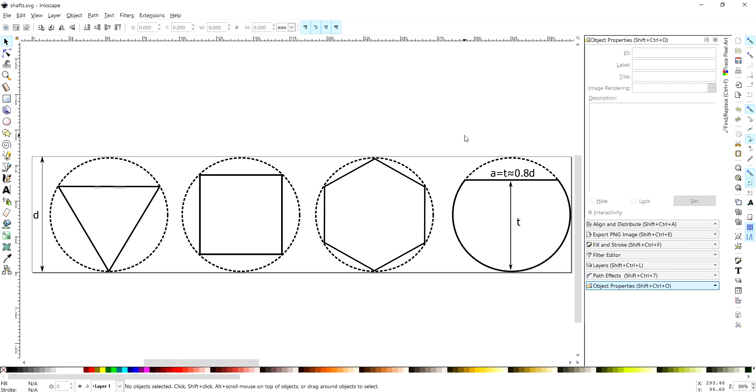Now basically I want to cut the cross section from the same size of the shaft. Here I use a 20 millimeter shaft, and then run a simulation using a linear simulation and a linear contact. I will explain about that later. Only for the D shaft, you can cut different cross sections by changing T, but the best performance you get is from a D shaft where 20% of it is cut off. So the remaining T is equal to 80% of the diameter.

So let's move to NX. I start by modeling the shafts first. Here I first make the main shaft, a 20 millimeter shaft.

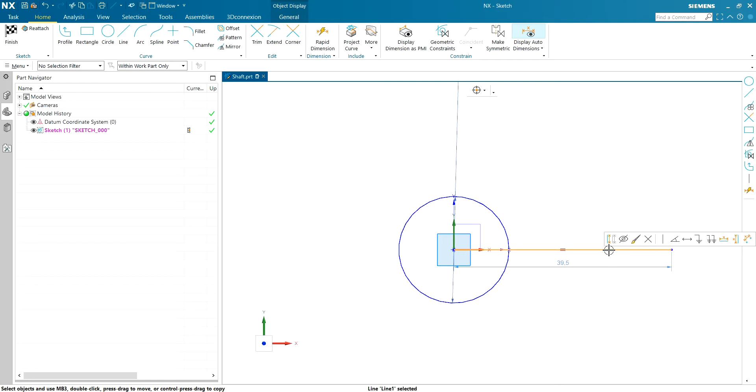And then I need a reference line to replicate this shaft. I'm gonna use pattern, and pattern this curve along this line. I have 4 shafts and click OK.

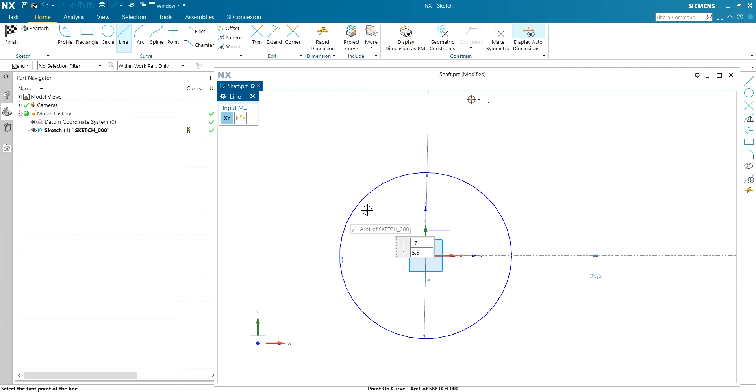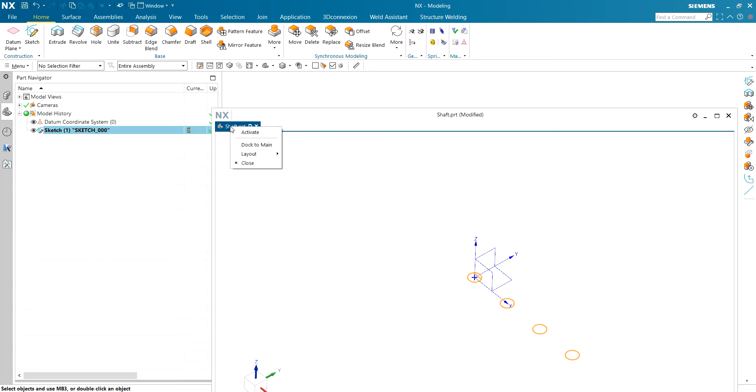First one I'm gonna do is the D shaft. Just need to make a cut here. Let me turn off this. And also let me... yes, and I need to make a horizontal now. Okay.

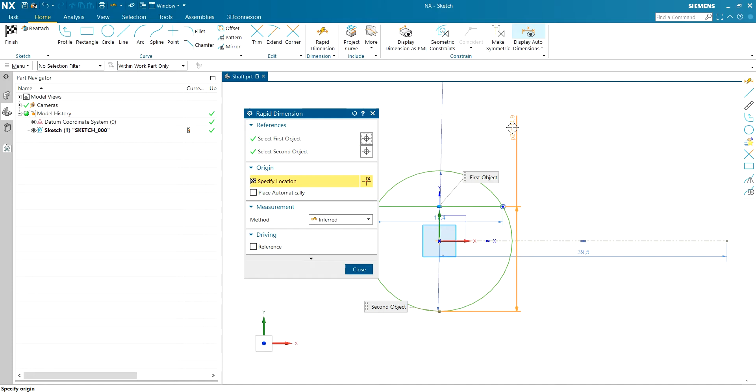Now it is horizontal, and then I need to have a dimension here, from here to this point. This should be 0.8 multiplied by 20, or 16. Now the shaft is ready and I can extrude.

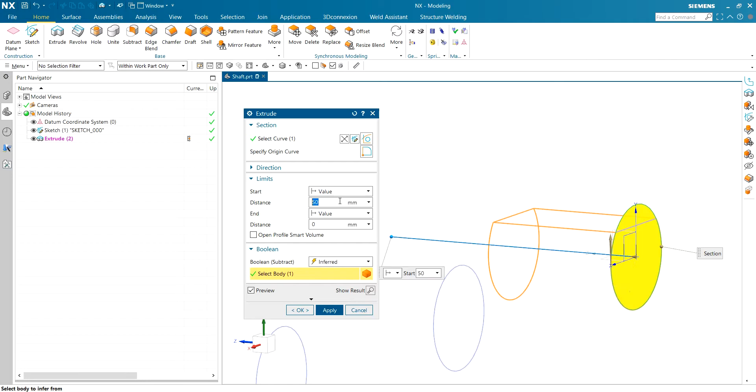I'm going with region boundary curves, and I want to extrude 25 millimeters on this side, and then on the other side I need a single curve. I just pick the circle, and 50 seems good. That's the other direction. I need to unite these two and click OK.

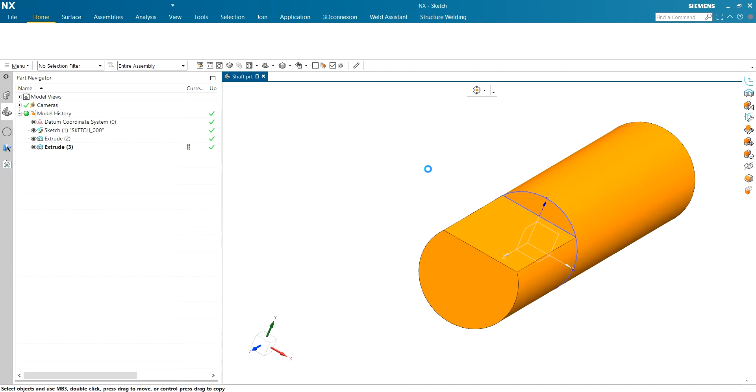So this is the shaft, and then I need to do the same thing for the hub. I start the hub from here.

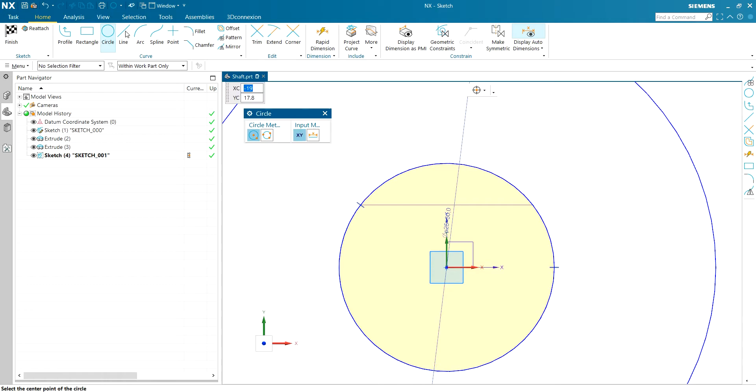Let me turn back this on, and 50 seems good. And I also need to make the D section that is matching my shaft. I need to turn this off, and here we go.

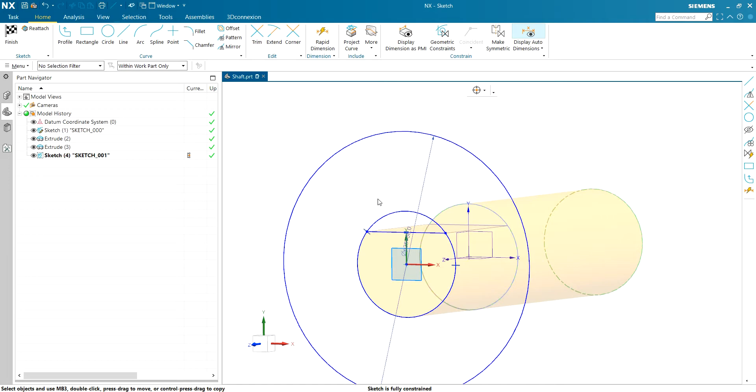And I can actually trim off the subpart, so I don't need it. And now I can extrude this, for 20 millimeters, leaving some gap here because I don't want these two faces to be in contact. This contact has no effect on the simulation, so I leave some space. Also, this sharp corner here is going to generate some wrong results, so I want to stay away from that.

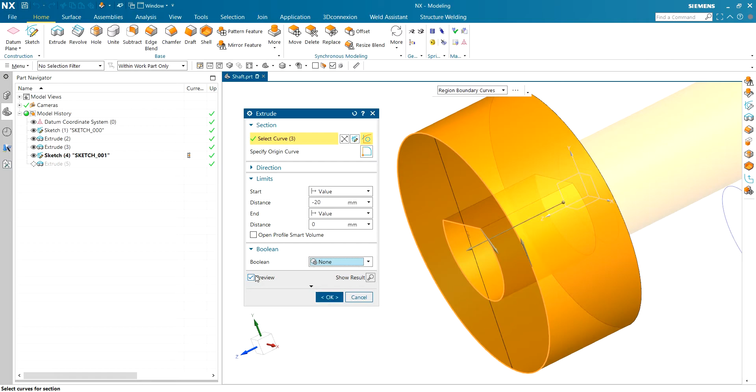Now, speaking of sharp corners, before we move on, you need to remember that we need separate bodies, so we shouldn't unite here. Or you can just model the hub in a separate part and bring it to this as an assembly. But here I use none for the boolean, and now we get two bodies: the hub body and the shaft body.

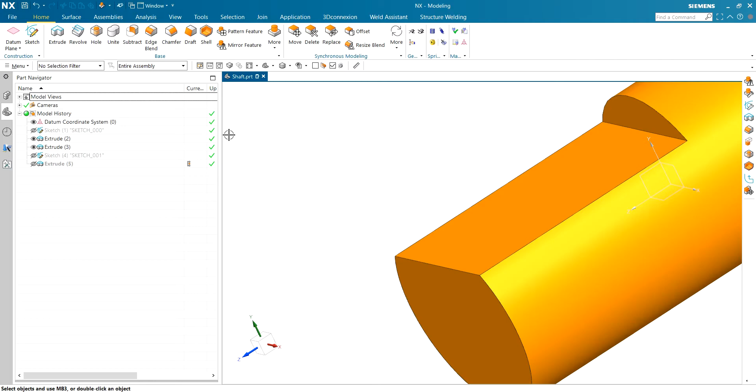Now starting from the shaft, let me hide the sketches. I have two sharp corners here that are going to make problems by causing singularity. So I'm gonna generate a fillet here and here. Sorry, this is chamfer, an edge blend. 0.5 millimeter is good. I will do the same for the hub.

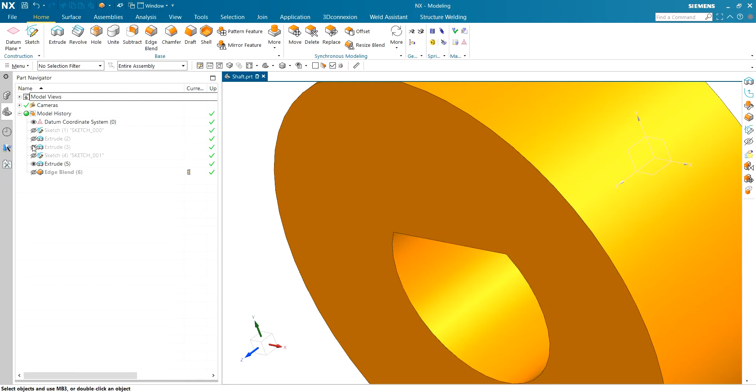And now I can take this to the pre-post. I'm gonna save here. And go to the pre-post.

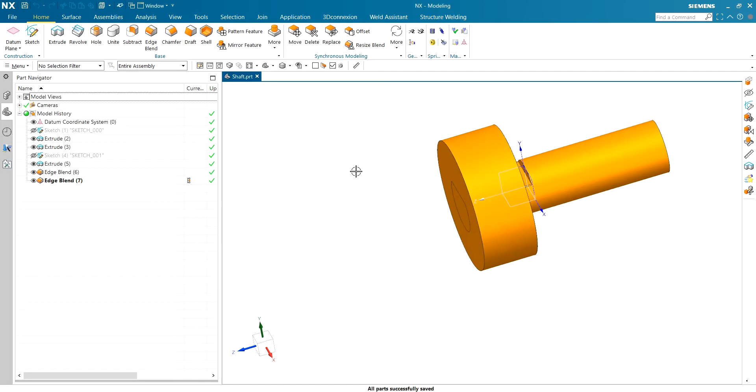Now before I make a new FEM and simulation file, I want to divide the face here on the hub so I can make a contact pair between the shaft and the hub. Otherwise, I have to make a contact between the whole outside face of the shaft and the internal face of the hub, which makes the simulation slow.

To do that, first hide the hub and I'm gonna use divide face. The face that I want to divide is basically all the faces I can select, and then offset the curve. I'm gonna offset these curves, and this line here shows where it is cutting, and I'm gonna go with 20, which is the size of the hub. Okay, so now we have a cut here.

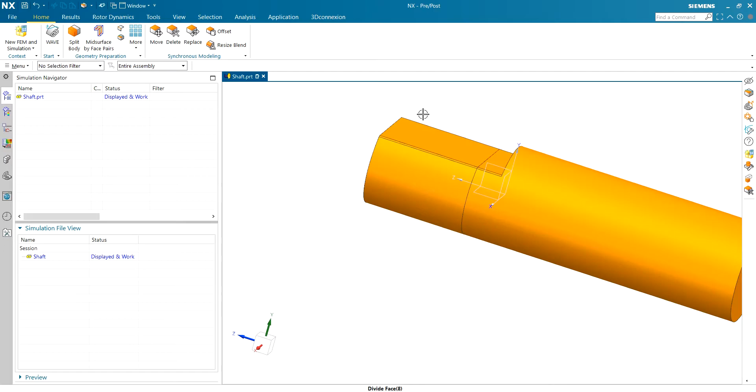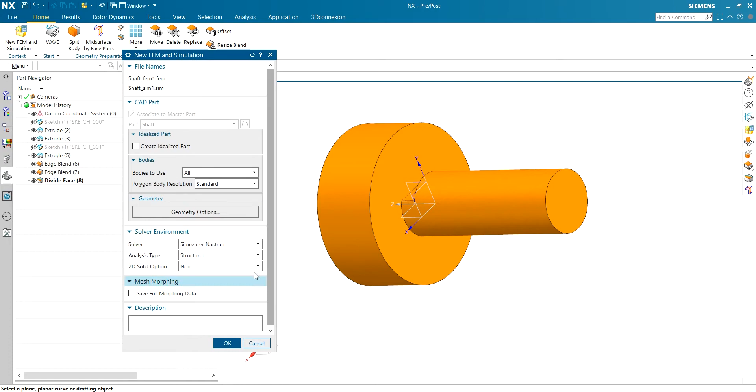And let me bring back the hub. Yes, now we can see that I have a cut where the hub is sitting. Now this is ready for the FEM and simulation file. So I'll make a new FEM and simulation file. I want all the bodies in the simulation. Click OK.

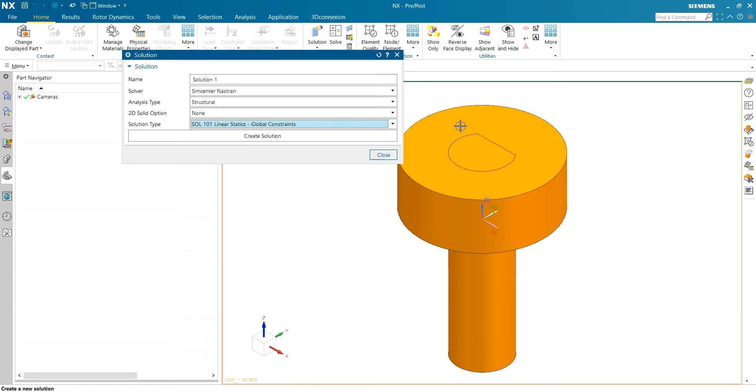Here in the simulation, I want to do a linear static, but you need to know that contact in nature is nonlinear. So usually you need to go with 401 multi-step nonlinear, or 106, or 601 for advanced nonlinear statics. But only if the deformations are small, you can use a static analysis and linear statics and linear contact. Now, to make that more clear, I'm going to show this example from the NX user manual.

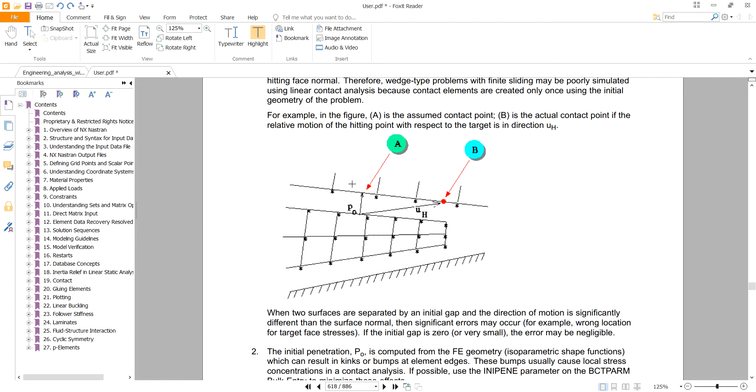As you can see here, we have a wedge that is moving in this direction, and these faces are going to be in contact with the top faces and bottom faces. In a linear simulation, the software reads the geometries only once at the start of the simulation, and it will assume that faces are going to touch the faces in front of them that have normals facing each other. So the software will assume that this point P0 will touch the outside face at this point, and other faces are also touching like this.

But in reality, the wedge is moving this way, so this point P will touch here in reality at point B. But a linear simulation or linear static does not consider large deformation like this. The deformations are small, so that's why in linear contact, the software will set this as the contact point.

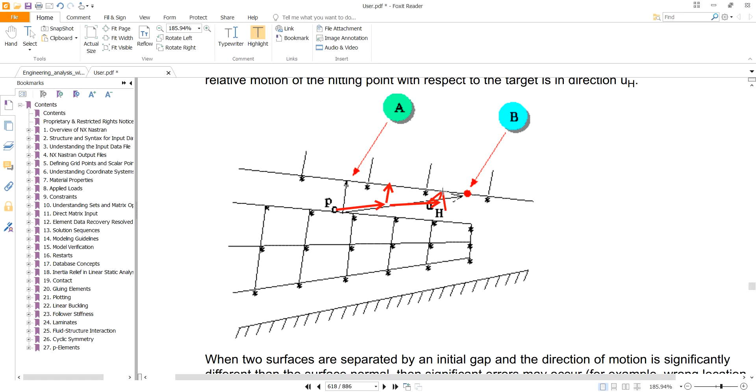In a nonlinear simulation, the software actually regenerates the contact faces. So this face will move here. There is now a new pair of contacts, and the software looks at that and it's going to be at this point. Then the wedge moves a little bit forward to this point, and the software generates a new contact pair from this point to that point. At the end, when the face reaches here, the contact generates the last contact pair at this point. So you need to make sure the deformations are small, otherwise you cannot use linear statics.

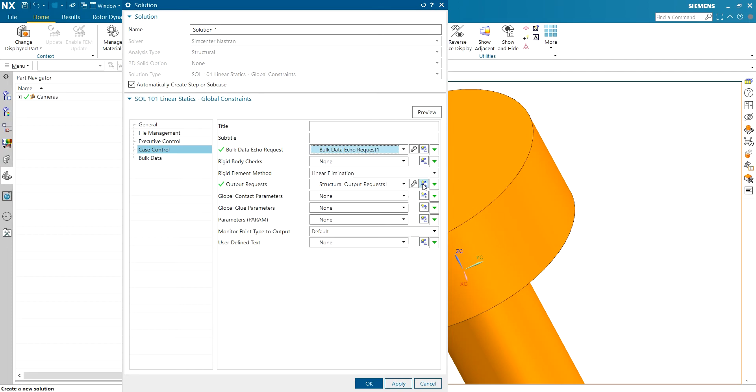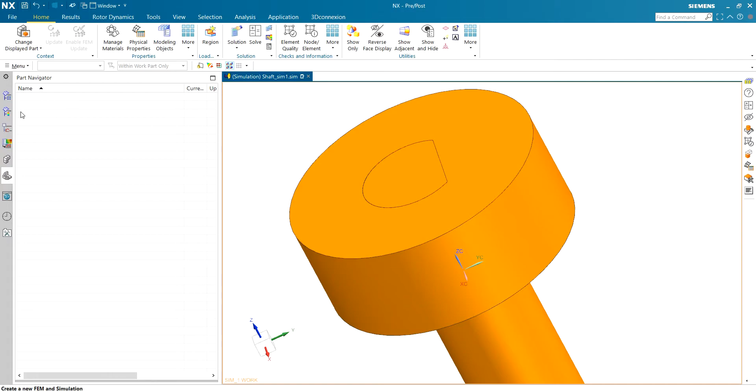Here I assume that the deformations are small, and I can use the 101 linear statics. I create a solution, and before moving on, we can also change this in the solution edit options. I want to request more output, so I will change this. Note that you can request any kind of output that you want from the software, and it will show up in the results. Here I only want to turn on the contact result so I can see contact pressure and contact force. Click OK and it will make a new solution.

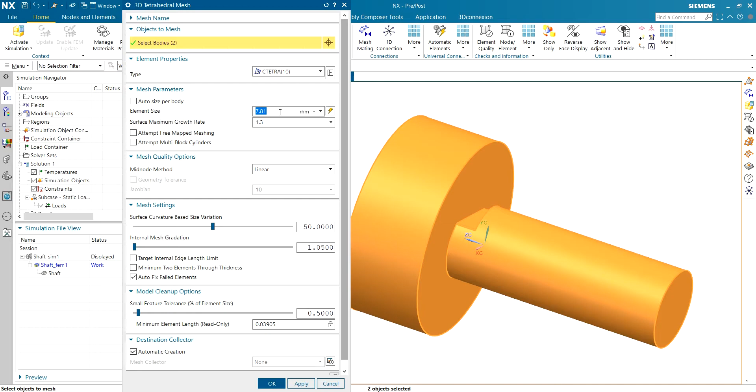So here we are in the .fem file and we can start meshing. We'll use 3D tetrahedral and select all the bodies. I reduce the size to 4. Let's see how it looks. Now let me hide the hub so we can have a better view of the shaft.

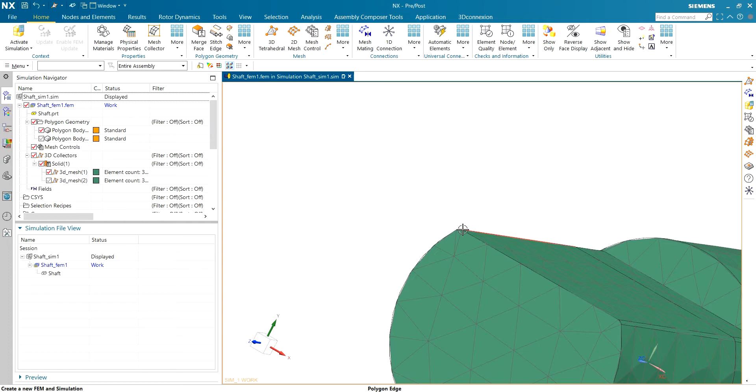Also with the polygon. Now here the problem is that I have a sharp corner on the fillet which may generate some singularities, so I need to make the mesh a little bit finer at the fillets. To do that, we can use mesh control on these faces, and we can use the fillet option and pick these two fillets. The sizes are okay, and I'm going to do the same thing on the hub. Doesn't matter if you pick the polygon or the mesh.

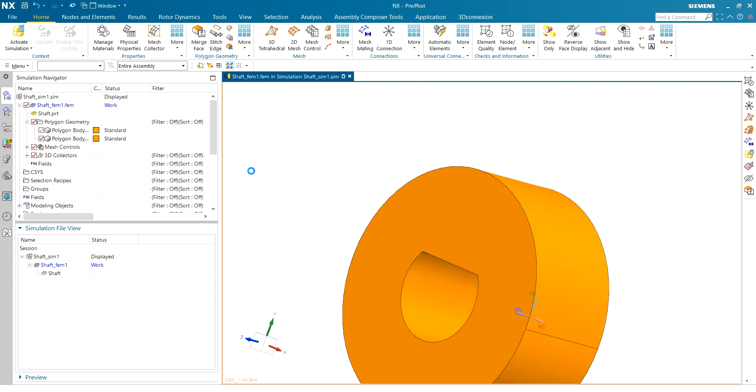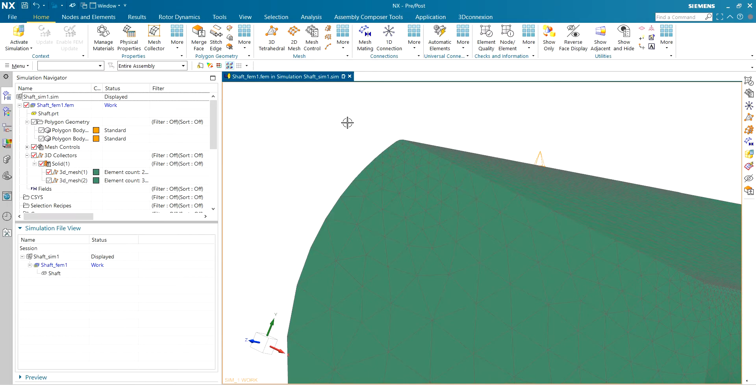Here I have a fillet here and one here. Use the same size and update the mesh. Now if I bring back the mesh and hide the polygons, let's take a look at the shaft. Now you see that I have a bit of a finer mesh along the fillets, except this end, which I'm not going to look at for the result. If we take a closer look, now we have two elements along the fillet.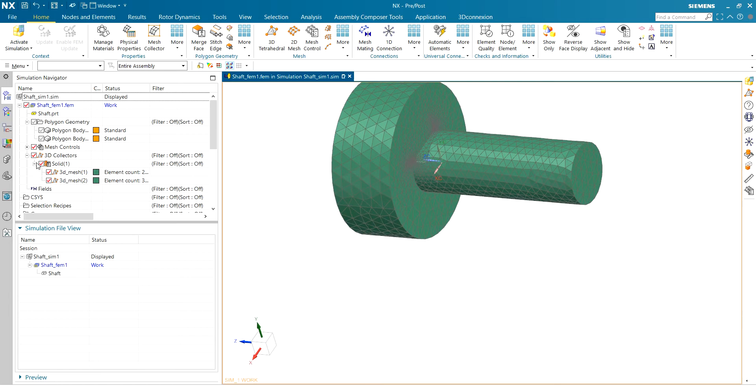So the mesh is ready now and I can apply the constraints. Let me hide the mesh and bring back the polygons. I'm going to save here. Before I move on, I can also define the material. Here I'm going to use aluminum, and okay.

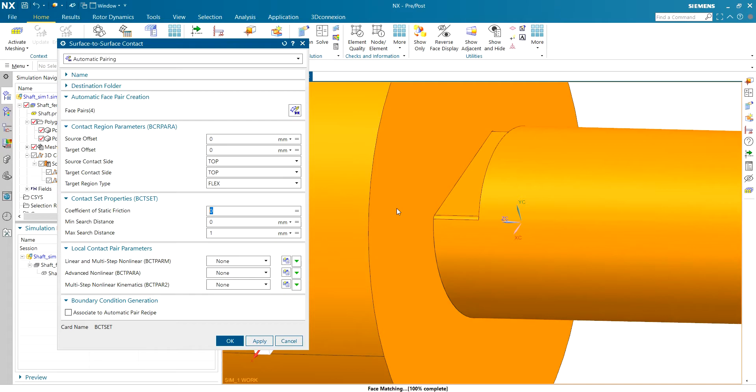Let's go to the simulation file. Now the first thing I want to do here is make a surface-to-surface contact. Here I go with automatic pairing and select all the faces and click OK. You can see that we have 4 pairs, which is the face that we made and the face of the hub, plus the fillets, the top face, and the other fillets. It's going to be 4 faces.

I also want to add some friction, and click OK. Now if I hide one of the bodies, here you can see the arrow that shows the contact face. Here we also have an opposite arrow from the hub, so the contact is set. Now I can set the constraints. First I want to fix the hub, only the outer side of the hub.

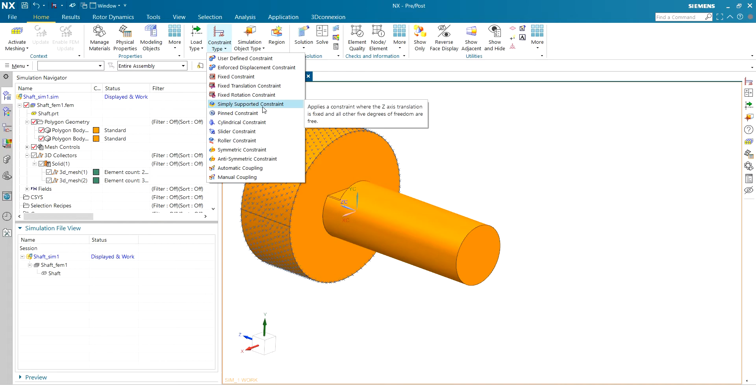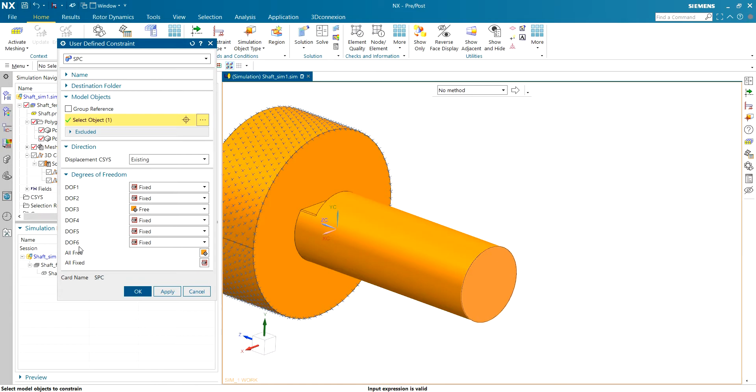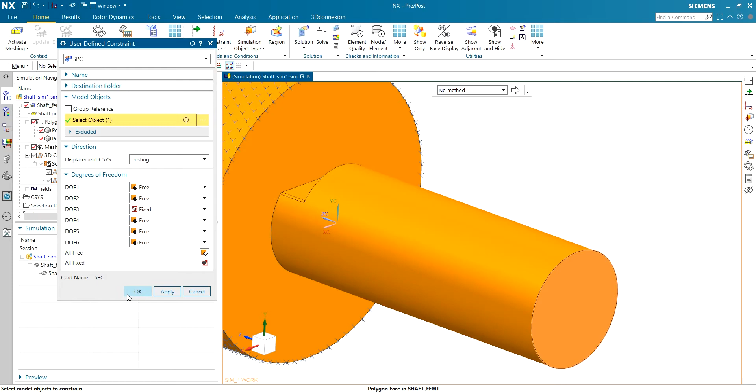For the shaft, I only need to fix the Z translation. The rest will be handled by friction and contact. I'm going to define a user-defined constraint, and it's enough to only define it on this point. I want to fix all the degrees of freedom except the Z movement. These DOFs from top mean XYZ translation and then XYZ rotation. This is the vector or coordinate system we are using, so I'm fixing the Z translation. I need to free everything and fix only the Z translation. Now you also see it with a cross on the Z direction.

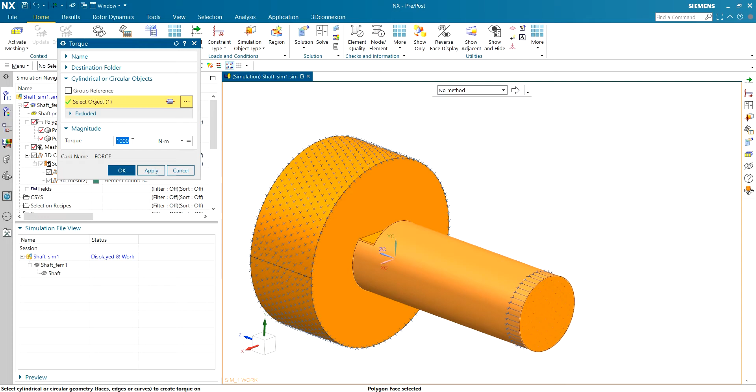And last is the load. I want to add a torque on the shaft, and we need to use the same amount of torque on all shafts. So I'll go with 1000, or let's go with 10 Newton meters. Click OK, I save here, and I can solve the problem.

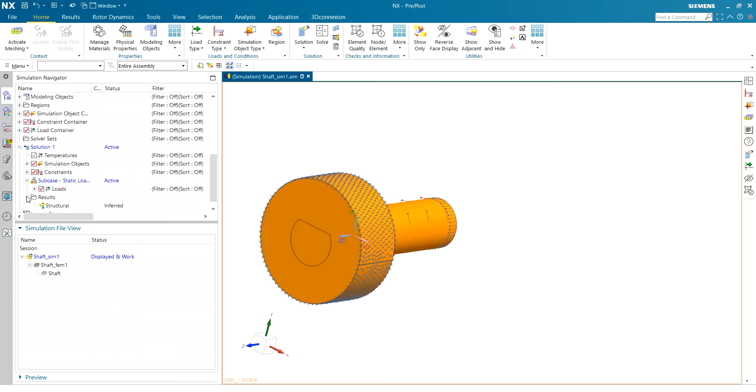Now the simulation is completed and I can take a look at the results. Go to results, and first I want to see the deformation result. This is of course exaggerated, scaled up by 10% of the model. This is the absolute deformation, but this is not what we expected actually.

You see that the shaft is actually squeezed to the top of the hub, even though the maximum deformation is really a small hundredth of a millimeter. But the behavior is not what we expected. If I play the animation, you see that the shaft is actually moving up and pushes to the wall of the hub.

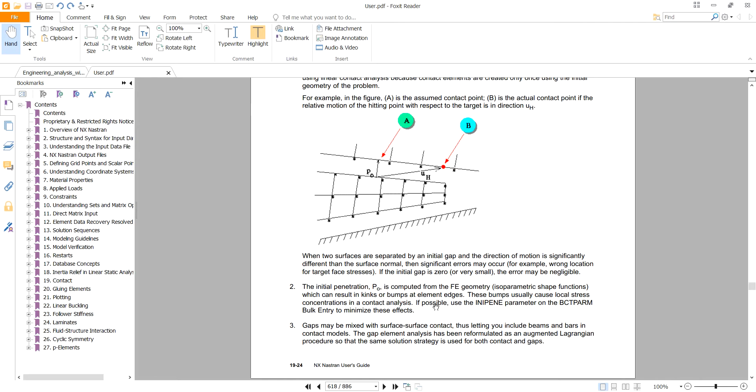Let me explain what's happening here from the user manual, which points out this problem. It says that because of changes in geometry that are not reflecting into the mesh, they result in bumps or kinks. These are the problems with initial penetrations.

Let me go back to the mesh. Here I can explain what's going on more easily. On the geometry, we have 2 geometries that are matching perfectly, but if you look at the mesh, let me bring back the mesh. At these points, for example, I have an initial gap, and at these points, I have an initial penetration.

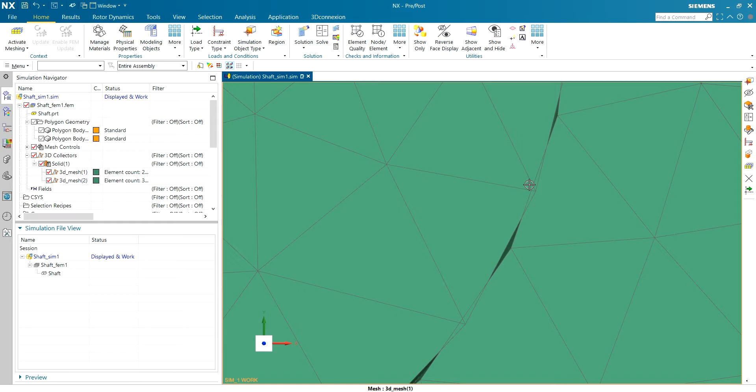These penetrations that you see here will have an initial pressure toward the upper side of the shaft, and it's going to generate a distribution of pressure along the shaft, which is squeezing the shaft to the top.

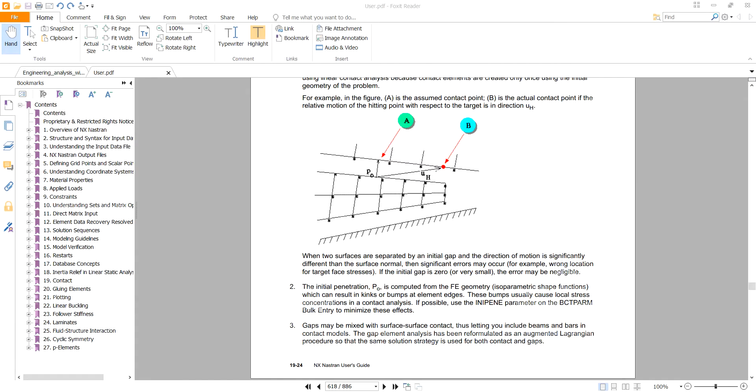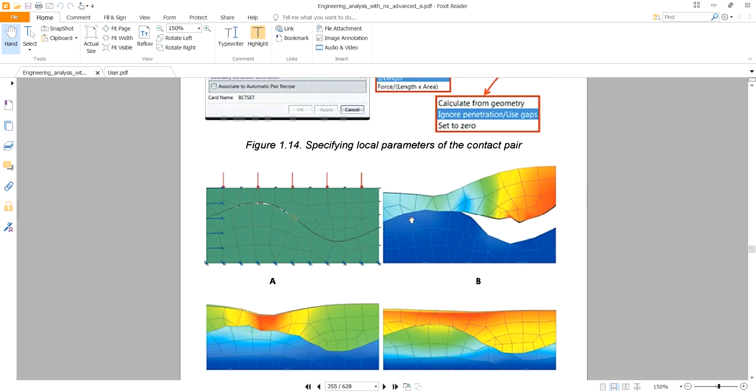This is also mentioned in the engineering analysis with NX Advanced Simulation, which I really recommend taking a look at if you want to work with contacts. It is mentioned that if you have curved faces, the mesh will not reflect the geometry perfectly, and you're always going to have some initial gaps and initial penetration.

It is mentioned here that you can easily fix that by changing the contact options. Here I go back to simulation objects, face contact, and we can set some extra options in linear contact or BCTPARM parameters. On the initial penetration, you have different options. You can set the penetrations to 0 or both gaps and penetration to 0, which is very good for simulations where you have initial touching faces like the way we have here.

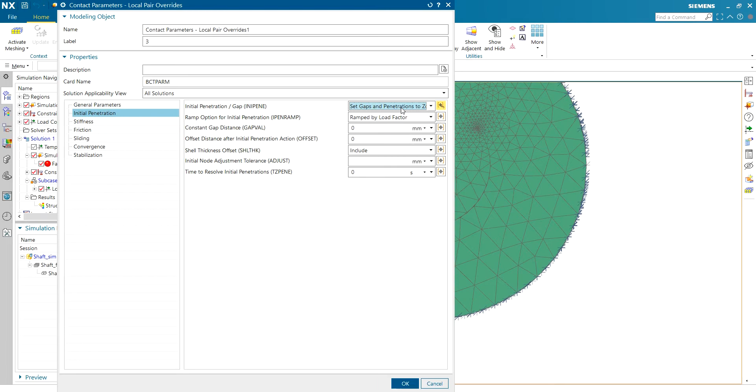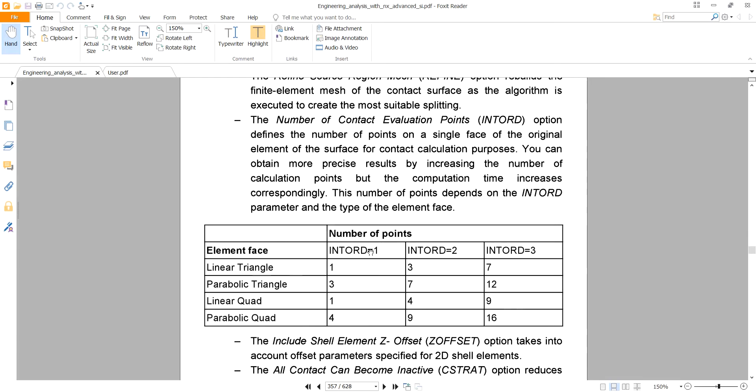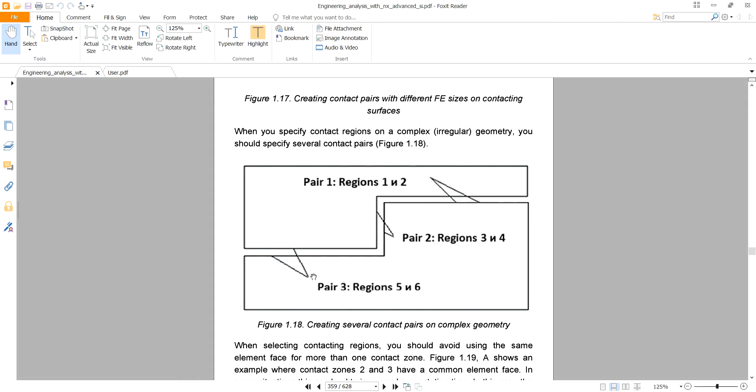So I set both gaps and penetrations to 0 from the start. I click OK. There are also more recommendations here, both in the manual and in this book, for example, it is recommended that if you have some contact faces, multiple contact faces along the cut, it's better to define separate contact regions, instead of defining only one contact face.

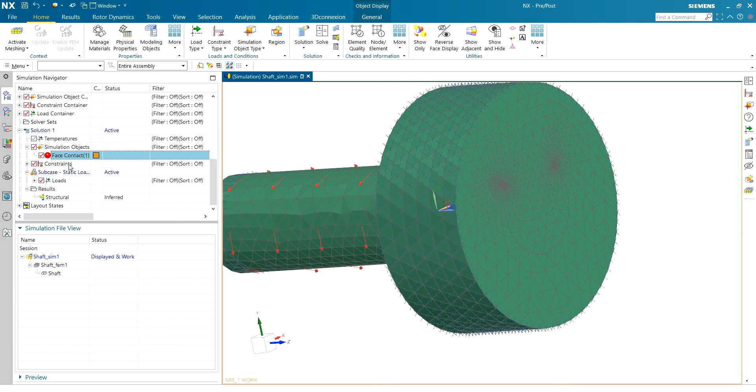So here, what I can do is go back and define manual contacts between separate faces. Let's go back and bring the polygons back. I will hide the mesh. I will start by removing this contact and then use surface to surface contact. I go with manual. Now I have to define regions.

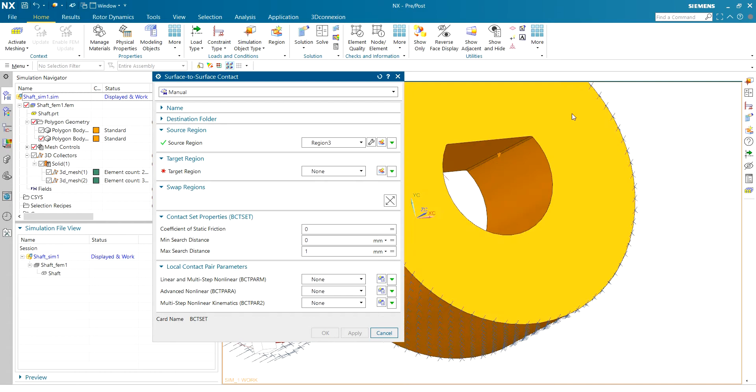The first region I want to have is this top face, and I want the contact between this top face and the bottom face of the hub. Let me hide the shaft. This is the face. I want friction as well, and click OK.

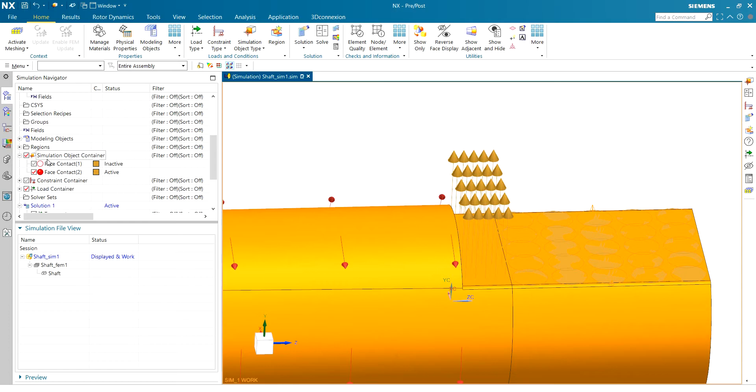Now you can see that I have to fix that region. Let me first hide the constraint, and then I need to go back, and also I'm going to remove all the regions. So I remake the regions and contacts again.

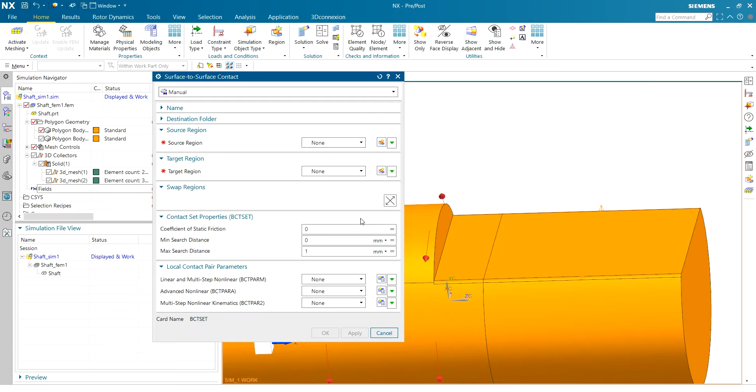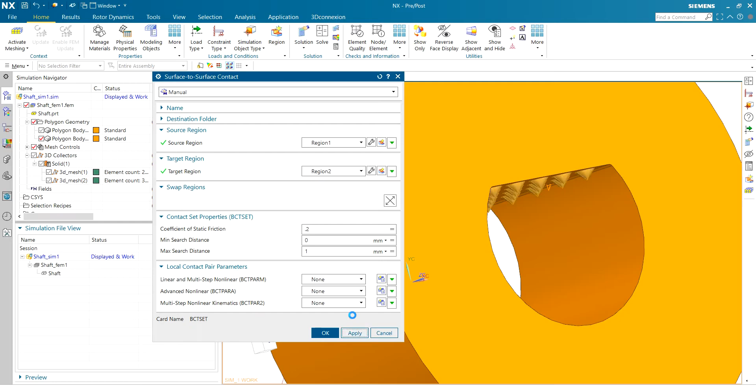First, let's just start from the top face of the shaft. The first region is this. And then the target region is here. Add friction and apply.

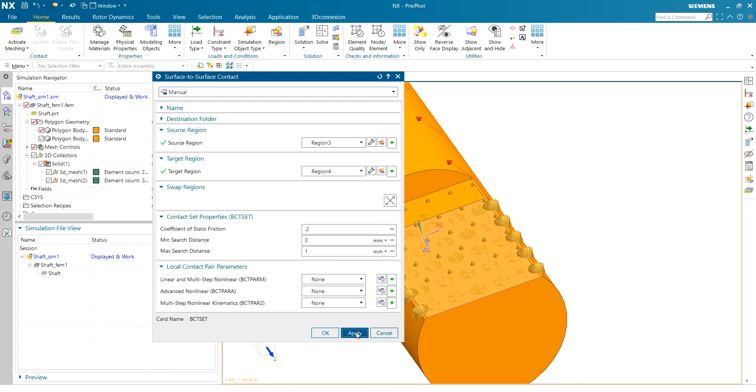The second region will be the fillets. So I go with this region. I can also add this region. And on the target, I have the same regions on the shaft. I select this and this fillet. Add friction and apply.

And the remaining one is this region as source, and then the same region on the hub.

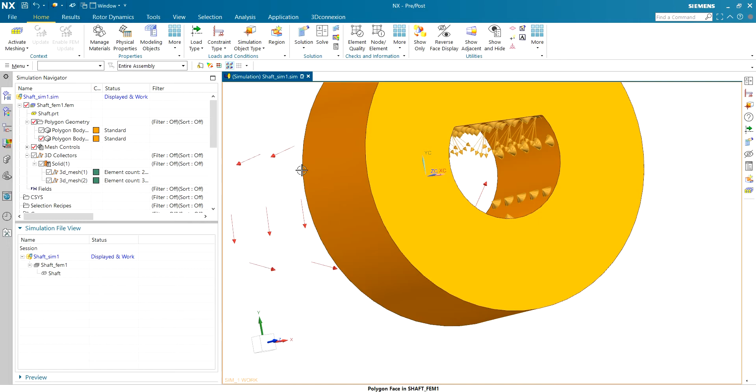Add friction and OK. Now here you can see the vectors pointing out as contact. And now if you check the simulation objects, you will see 3 different contacts. Now here you don't need to go into each contact set and then set initial penetration and gap to 0.

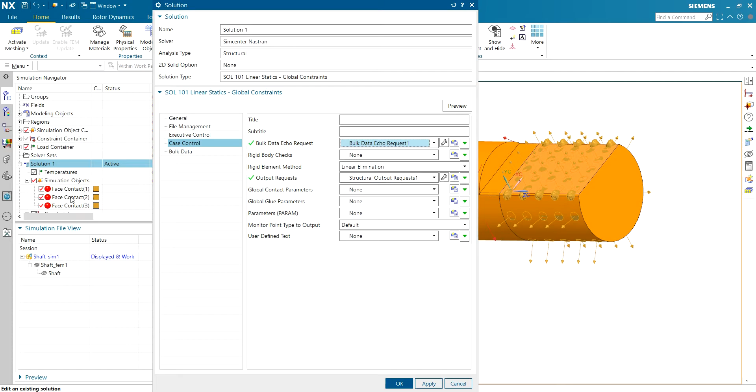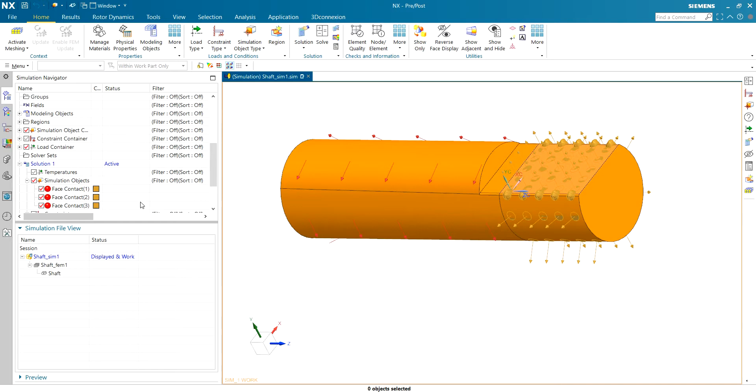But we can do this on the solution. I'll edit the solution. Here we have global contact parameters. This will override any contact parameters. So if I do it here, it will override all the options. Here I can change the calculate from geometry to set gaps and penetrations to 0, and that will change all the contacts.

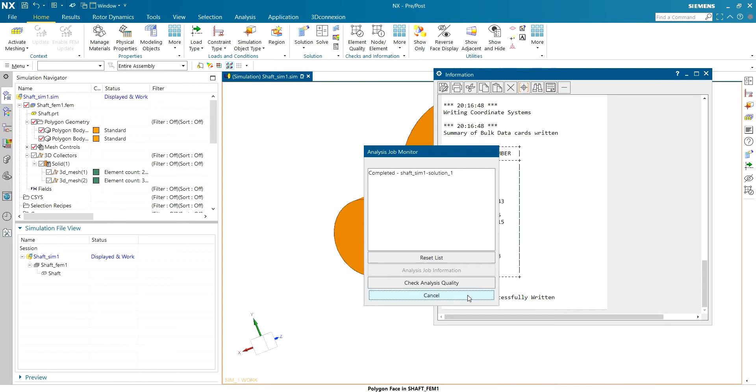I'll also check if the output still has the contact result, which is correct, and OK. Now I solve it for the second time, and let's see the result. The simulation is now completed. Let's go and check the results.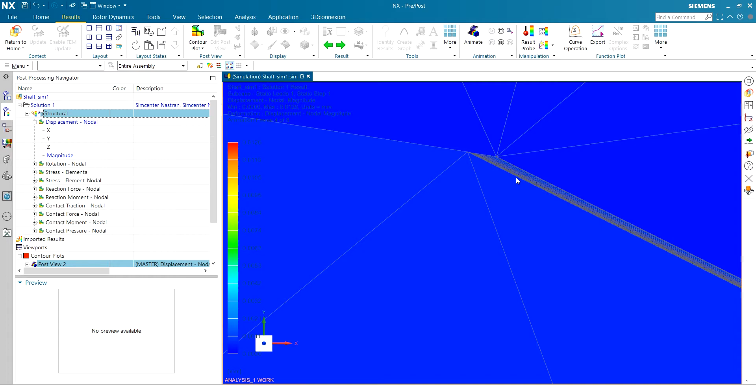Now this result is actually very important because if we have a plastic region here, this deformation is going to be your backlash. This will generate a gap as the shaft is deforming the hub, and that will generate a backlash. That's why D-connection is not good for applications that you don't want to have backlash, unless you have a set screw that is holding the flat side down.

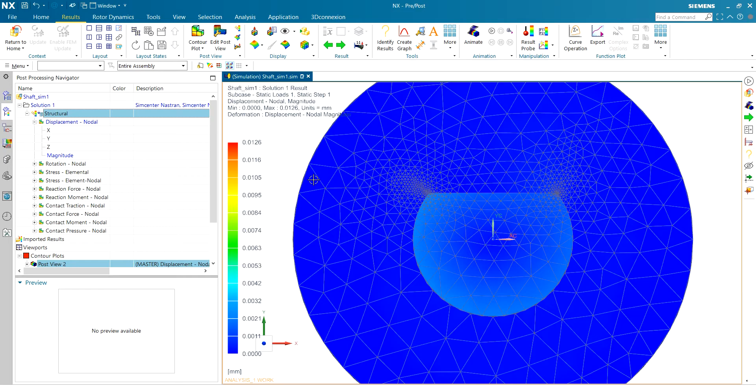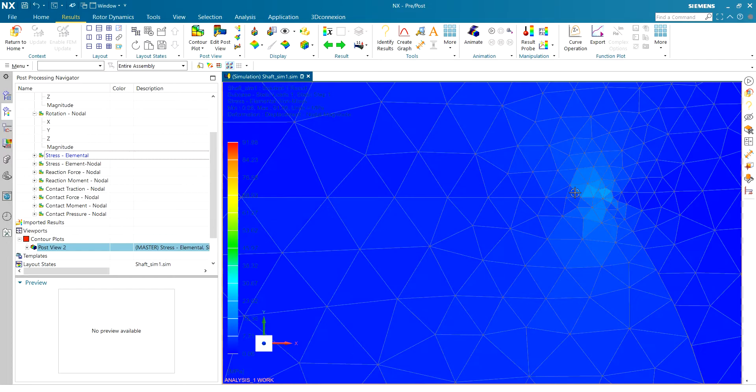Now we can take a look at rotation, which we don't have per element here. Stress is very important here. We don't have failure since this is aluminum and the yield stress is more than 91, but it's good to check where the stress points are.

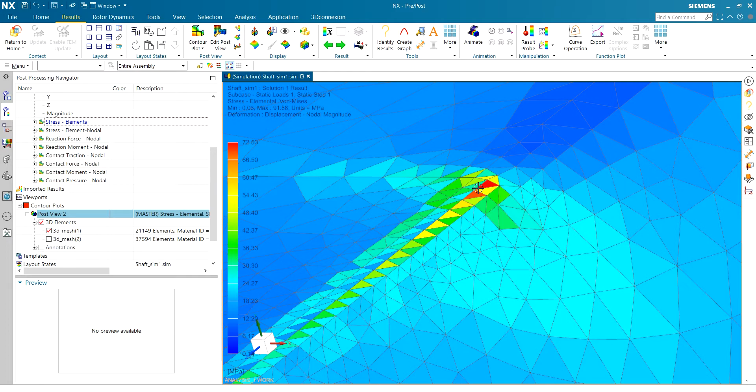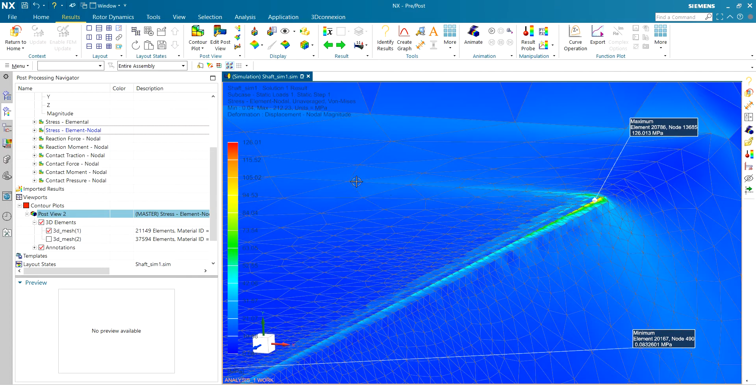And also I can turn on the annotations so it will show automatically the maximum and minimum stresses. And then the nodal stresses will get higher results because we have higher stress on the nodes, since the elements are some kind of average stress. Then we have contact.

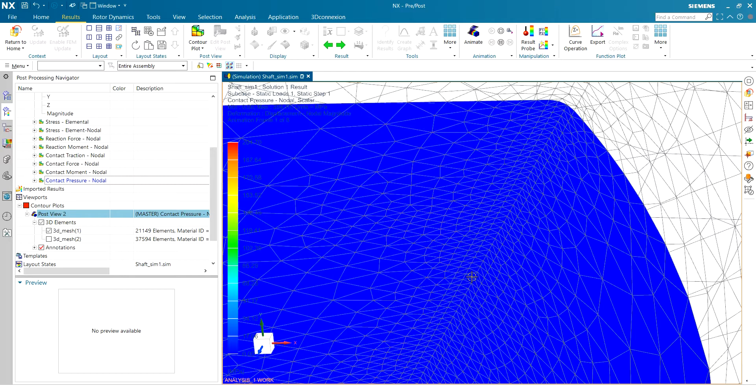The important one is the contact pressure. So let's see what we have and where we have contact. If I play the animation, we see how the contact is changing along the face of the shaft from top and bottom.

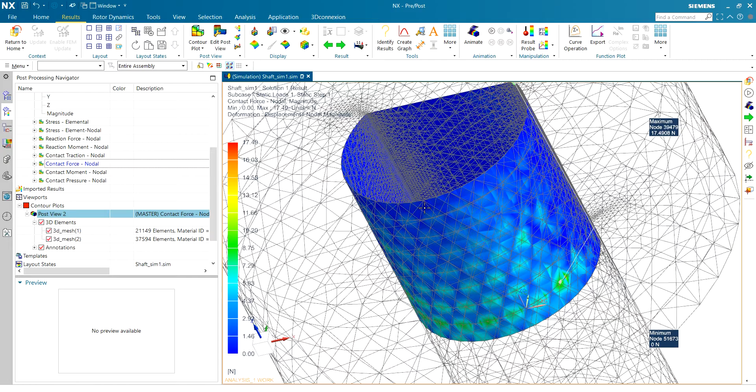Also, let's take a look at the contact force. We see here how the contact is changing. I can turn back on the hub. It will only show the contact faces here. If I play, we can see how the pressure of contact is distributed in a D connection.

Now here in the result, I want to check for the average stress and deflection. For the average stress, I go back to elemental stress. I'm going to consider only the shaft and assume that the same amount of stress will happen on the hub. And let me return to the absolutes.

I'm going to skip the sharp edge and pick the result of a box here. Can add more to make it more smooth. Average. So here I have an average of 9.88 as average stress.

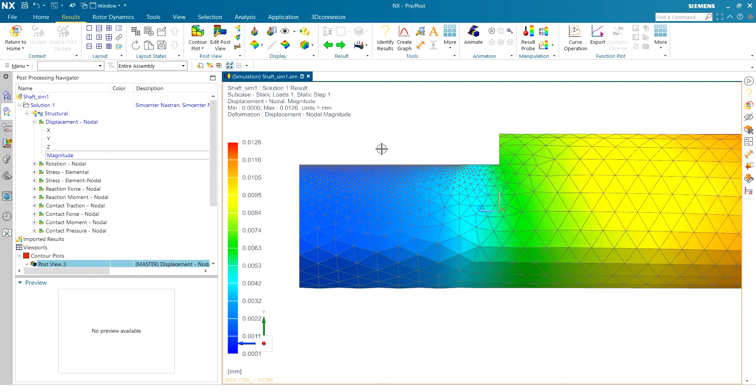Now for the displacement, I'm going to go with the displacement magnitude, and then I will measure the deflection of one of the corners. If you look at the 10% of modal deformation, if I play it, here the deformation is what I'm looking for because this is effective on the structural design of the shaft. We basically need a shaft that has less deformation inside the hub.

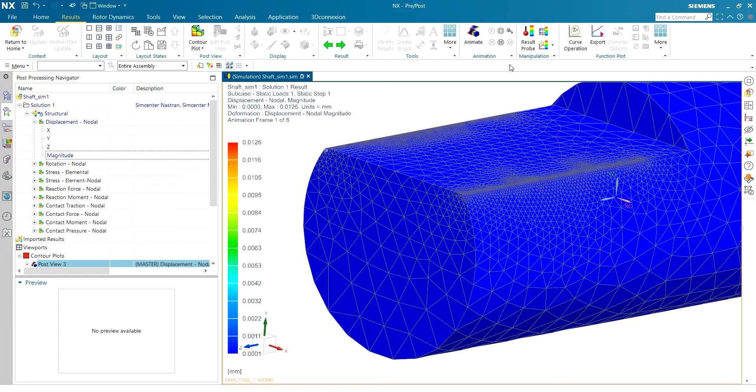So I will go to the absolute and then pick up a point in the corner, this point, and we have maximum. I'm going to pick, and we can check actually if we pick the maximums, we can average all these 3 points. So the average is also almost the same.

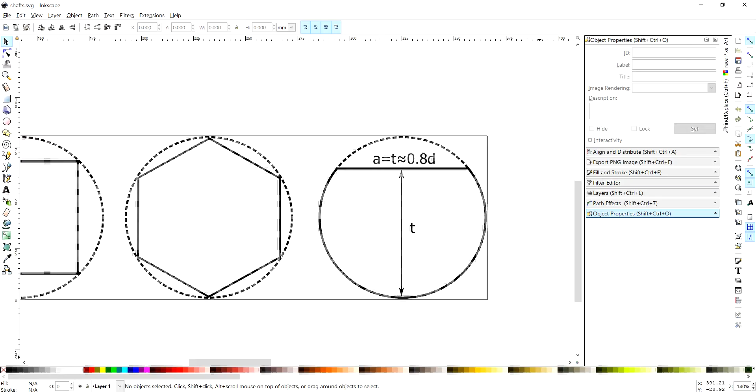So I will write the deflection here, and I can write D section. Now I have the D, and I can have the different cross sections that I showed here. I had hexagon and a square. So I need to complete all the average stresses and deflections, and then we can compare.